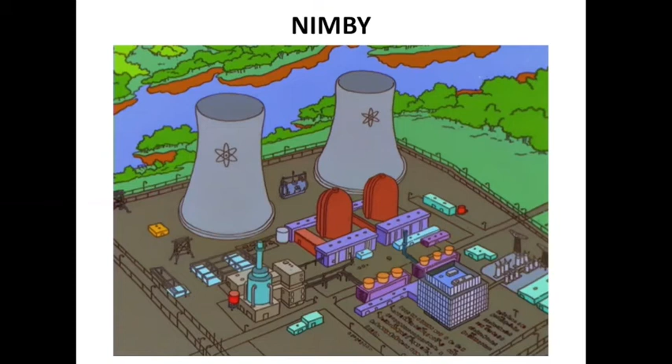Not in my backyard. That is one of the biggest complaints about nuclear energy. We say, oh, okay, my science teacher says that it's safe and it's not that bad, but I still don't really want to live next to one. I don't care if you build it in Illinois or Michigan, that's cool. We'll take their cheap electricity, but do not build one here. We don't want to face that risk, not in my backyard.

And it applies to not just nuclear, but to lots of things, right? That's the argument people say, oh, windmills, they're wonderful, but I don't really want to look out my window and see one. I want them off in the distance, not in my backyard. And so nuclear's got this PR problem, right? People will sit there and shout, oh, it's dangerous and it's bad. And they're not actually talking from facts usually. They're just talking from reputation.

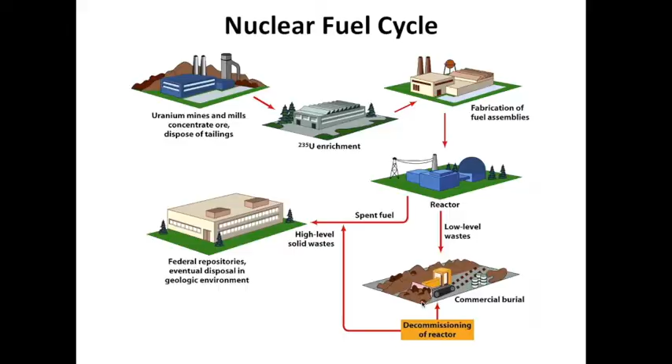I told you yesterday that most of the uranium on Earth, 99%, is uranium-238. Uranium-235 only makes up 0.7% of the natural uranium on Earth. So it's much more rare and difficult to obtain. What we have to do is we have to make sure that our fuel pellets have at least 3% of uranium-235. That's what keeps the chain reaction going. And it's what we call fissile.

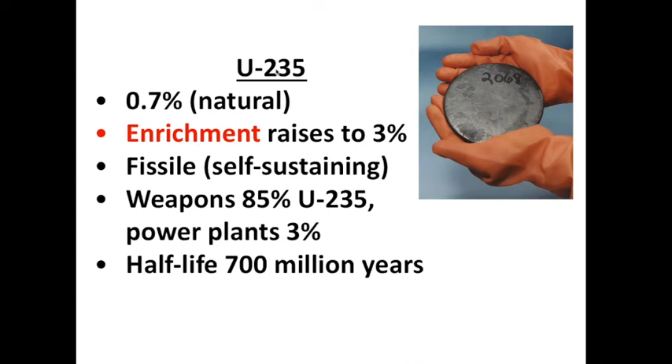Here's one of the big safety things that I love to point out. A nuclear power plant cannot explode like a nuclear bomb. It's impossible. You will not see a big mushroom nuclear cloud if a plant was to explode. And that's because to make that kind of explosion, you need 85% of this kind of uranium. And we're only using 3.

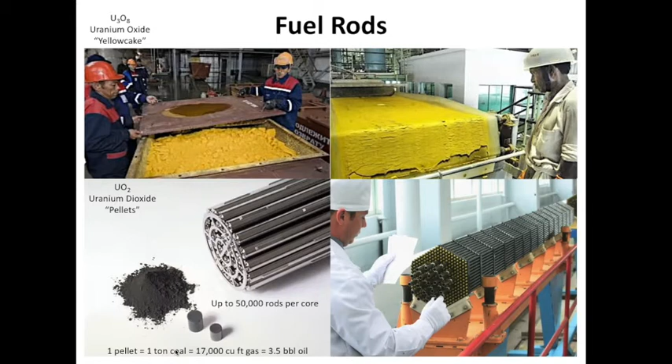Now look at this. They line these pellets up, slide the pellets into these big long tubes, and these are called fuel rods. One pellet is equal to an entire ton of coal. That's amazing efficiency, right? All right, so they line these things up, drop them into control rods. Now, here's the next safety feature built into all modern nuclear plants. These fuel rods are down in this chamber, and that's where the chain reaction happens, and they heat up and boil the water.

But we have these things called control rods. And the control rods can move up or down, and they go in between the fuel rods. When the control rods come down, they shut off the reaction. You know what happens if the power goes out at a nuclear power plant?

The control rods automatically drop and start shutting down the reaction. Did that happen in Japan? Yes, it actually worked. As soon as the power went out, control rods came down. Now, they still take a while to completely stop the reaction, and so they still have to cool the water.

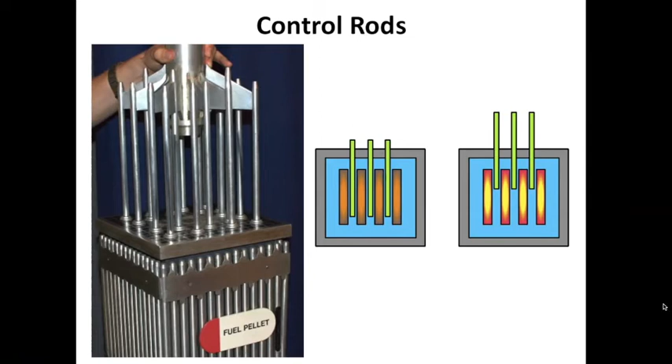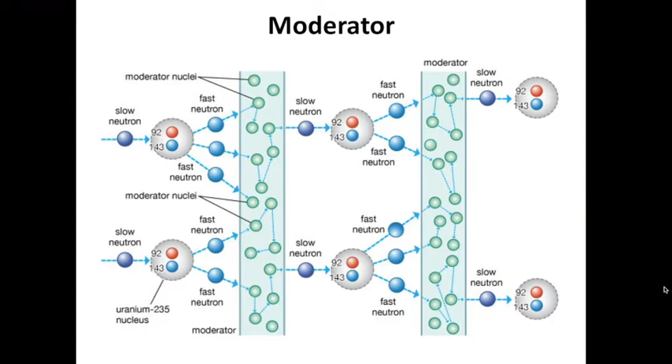So that's your first line of defense in a nuclear power plant: automatic shutdown, gravity-driven control rods. If they want the reaction to go faster, they just lift the control rods more. The more they lift it, the faster the reaction goes. A moderator slows things down. And in this case, the main moderator used in nuclear plants is water.

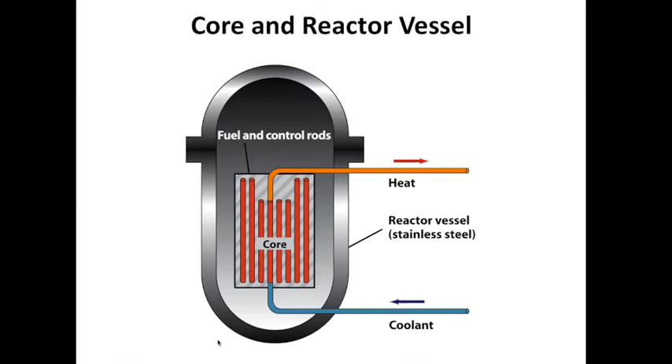So we got the control rods, we got the fuel rods, and we're using it to heat up water inside the core in the reactor. They put a giant, like 3-inch thick steel shell around the reactor. And then they take it 2 steps further. They put a concrete shield around the entire metal reactor core.

Obviously, you need pipes to get out to heat up the water. And then around that, they build a second 6-inch reinforced steel and concrete shell. That's the big domes you see around it. So we've got only 3% enriched uranium. We've got automatic control rods, and we've got 3 layers of steel and concrete to protect this core.

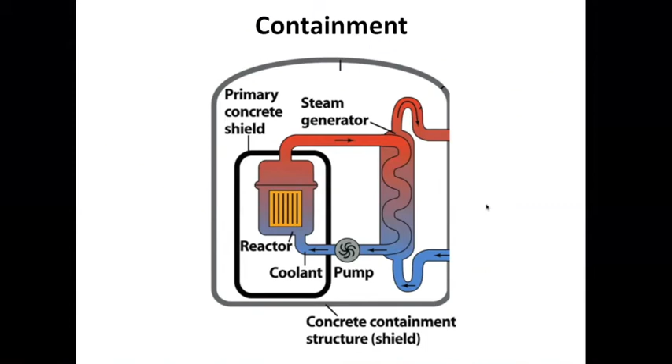Notice that the water that is actually radioactive never touches any other water. It's in its own closed loop. Now, in the next loop, that's where they make the steam, and it's in its own loop. And then there's even a third loop. Okay, so we got the nuclear reactor. We've got the water that's spinning the turbine, and it's in a closed loop.

And then we have what's called the thermal wastewater. So to cool everything back down, they use water usually from a river or a lake. Now, there is a little bit of environmental damage here because that water is warm. And when that water goes back into the lake, there's less oxygen. Warm water does not have as much dissolved oxygen as cool. But you're going to have that with any thermal electric power plant, fossil fuels or nuclear.

Remember that if I cut the left-hand side of this diagram off and all I put instead is a coal fuel furnace, it's exactly the same. Coal and nuclear make energy the exact same way. They heat up steam to spin a turbine.

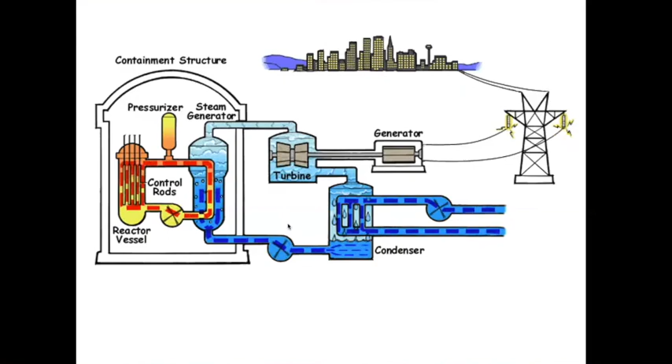Nuclear waste is kept on site. We have different kinds of nuclear waste. People who go in and actually perform maintenance on the core, their gloves and their tools and their gowns, those are potentially radioactive. There may have been something that got on them. So that stuff we simply put in a barrel, put it underground, and bury it and don't worry about it. It's no different than the background radiation that comes from rocks.

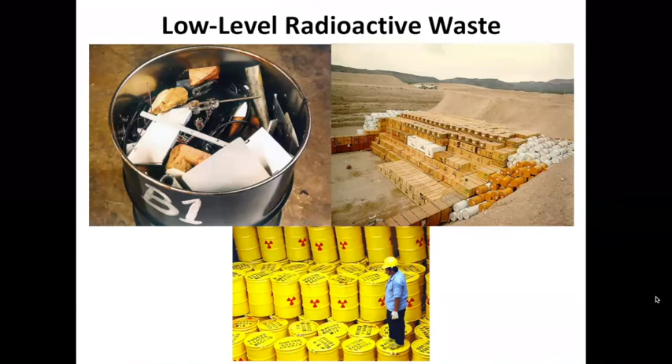But that's not the stuff that people are worried about. What they're worried about are the spent fuel rods. Once the rods are no longer producing enough heat to boil water, they get replaced. But they're still radioactive. And so we put them in barrels, and then we put them deep into swimming pools that once again are built right on site with the nuclear power plant.

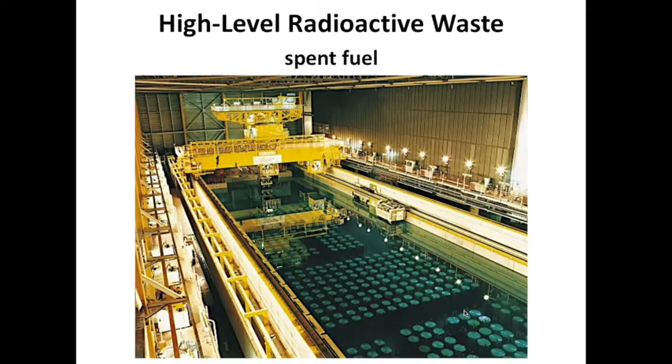There's been a plan to maybe start moving nuclear waste away from the facilities. Instead, we could put it all in one place, like a giant garbage dump, and then we wouldn't have to worry about it as much. Protect that big garbage dump and not care. So they actually explored this place in Nevada. It's called Yucca Mountain. That's where they did nuclear testing anyway. So there's already radiation in the soil.

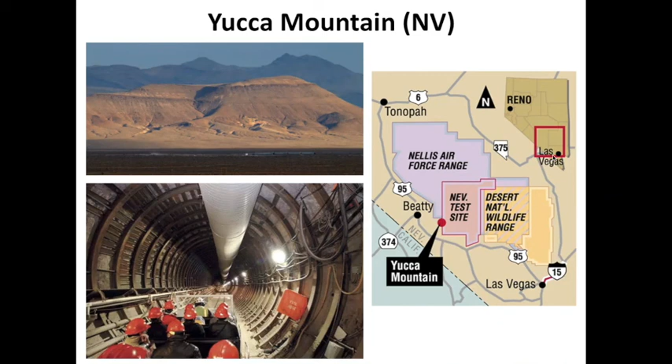And so they've got this plan to bury it deep underground in this mountain. Now, they have actually built the facility already. You can see it's not too far from Las Vegas, but that's about the only thing around. They've already built this. They spent $90 billion on this already through different presidential administrations. And there is nothing stored inside of it. Not a single bit of nuclear waste.

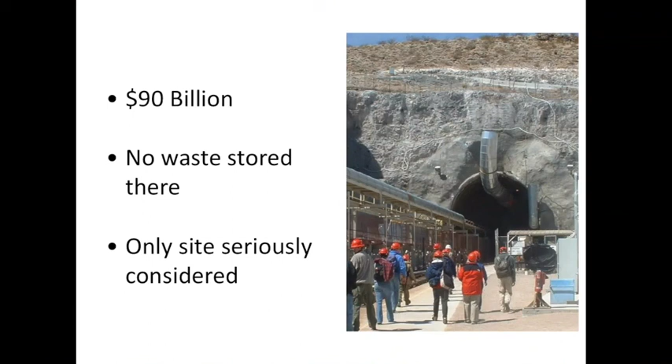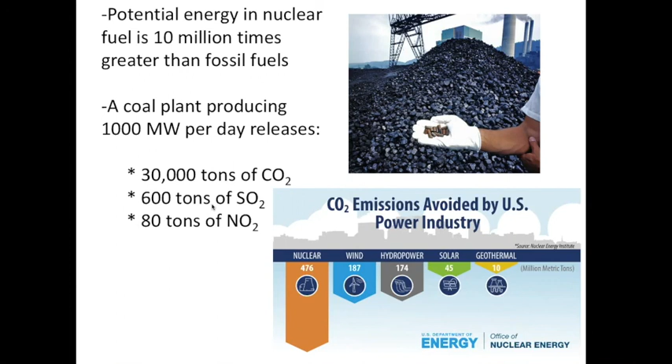And if you were to burn that coal, every day a coal plant releases 30,000 tons of CO2, sulfur dioxide, acid rain, nitrogen dioxide, smog. None of that comes out of a nuclear power plant. The only thing that comes out of a nuclear power plant is steam.